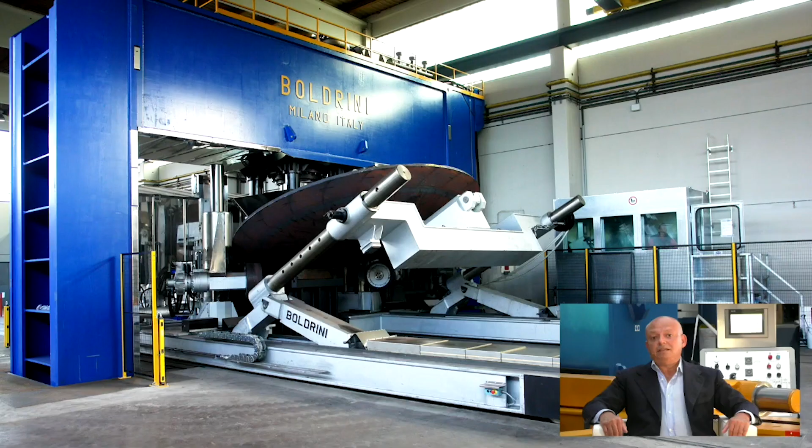Dishing press, 1,200 tons with automatic manipulator CN capable of working in hot and cold condition. Flanging machine capable of flanging up to 80 millimeter thickness material, 516 grade 70, and maximal knuckle radius of 1,000 millimeter. Rotex hot spinning machine. It's a unique piece of equipment capable of doing hemispheres and heads starting from a flat blank 7,200 millimeters and plate thickness 220. And also plate roll with variable distance, so the pitch of the bottom roll, 3-roll type.

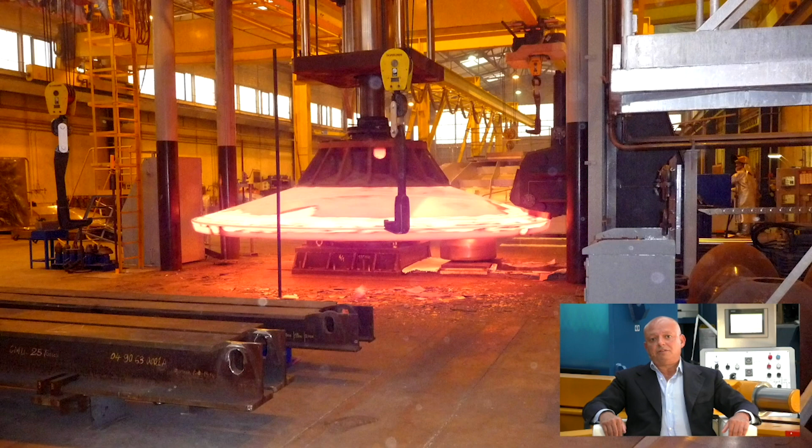6,750 tons. I think that there is always room for innovation and sustainability. Faccin Group embodies this spirit by offering to the market 3 leading brands like Faccin, Boldrini, and Roundo. Our challenge today is to achieve the highest level of efficiency in any kind of machinery that we produce. Well, I can definitely say that we are in very good hands.

But before we move to the main subject of this webinar, Rino, I wanted to ask you something. We have seen a huge interest in this webinar and many registered people from all over the world. Why do you think this is?

Well, Javier, let me start by saying that most manufacturers of pressure vessels, truck tanks, silos, and other kinds of tanks and pressure vessels purchase the dish heads and then weld the component to their rolled part. Let me tell you that the demand is huge and dish head manufacturers are getting overwhelmed. With the pandemic, deliveries, particularly internationally, have been disrupted. And there is now a new line of thinking about manufacturing locally, and I do believe this is driving our interest in this webinar.

Perfect. So we will focus on this concept and more during our webinar and explain in detail what we are doing to achieve efficiency in our machines. In the meantime, let me show our viewers our group's manufacturing capabilities.

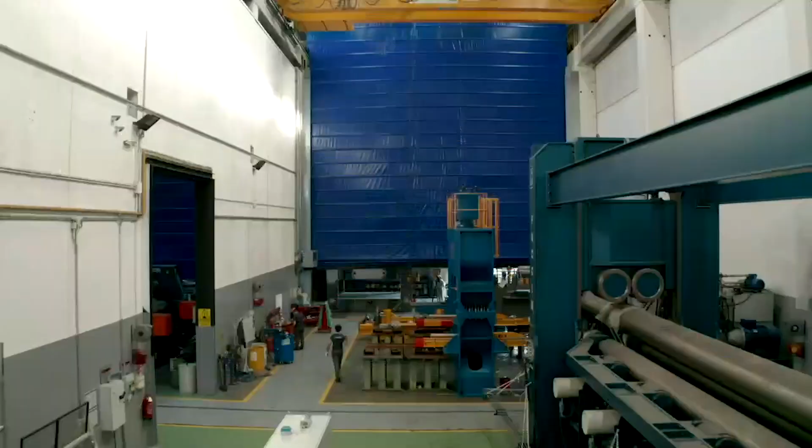Wow. During these days, we have been discussing all over the world about the impact of COVID-19 on the world economies and on industrial production after the restrictions applied to contain the pandemic.

So, Rino, what do you think about the vertical production structure? Javier, this is a real big thing. During the last decades, many industries have organized their supplies by outsourcing from the market. It has been understood very clearly now, when the market collapsed and many companies could not follow their production schedules and supply chains were not performing, that outsourcing can be risky in such a market condition.

As you have seen in the company video, at Faccin we have vertical integration. We start with plate profiling, fabricating, machining, and we can do internally turning, milling, boring, and polishing.

We found out that having this in-house has been the greatest support for our resilience. We have full control of quality inspection, pre-shipment commissioning, testing, and crating for shipment. It was a wise decision to keep vital and critical production stages inside Faccin. This allowed us to keep working and acquire new orders, as we have better control on delivery and scheduling.

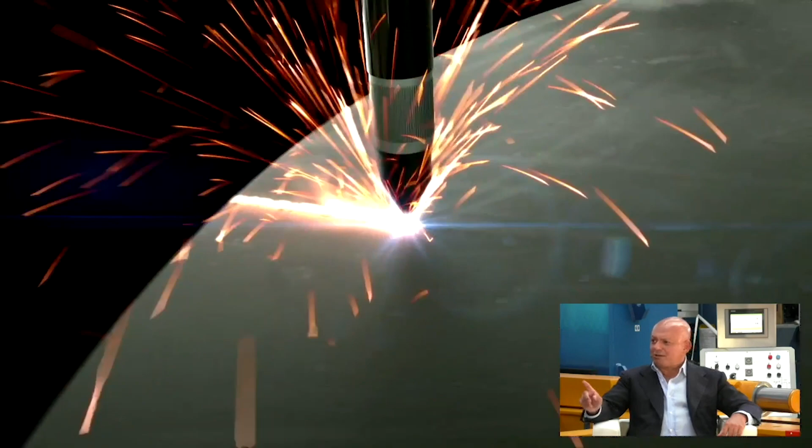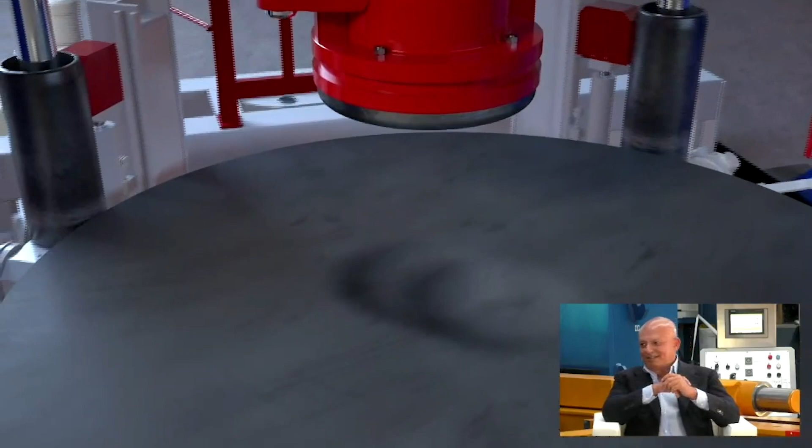Rino, we are now ready for the first main question. If I were a client, what should I know before investing in a new dish head line? At first, Javier, there is not a common rule. What is best for one client is not the best for all clients.

Rino, I think we both agree on your assessment. Tell us how to get the best solution for a specific customer. As a first step, it is very important to make the preliminary approach to the customer's needs. The pre-feasibility stage is the most important for the proper definition of the correct machine.

Let's ask Andrea Comparin, Senior Sales Manager of Faccin Commercial Department. Hi, Andrea. Can you introduce yourself and then explain what is generally the client's preliminary approach?

Hi, this is Andrea Comparin. I've been working at Faccin since 2011, and I've had the opportunity of traveling throughout the world for the company, mostly following Northern Europe and some Mediterranean countries. I also joined the sales team for relevant projects all over the world, from Australia to South Africa, Middle East and Far East.

Generally, we deal differently with inquiries coming from new clients planning to start a new production line versus clients already experienced with presses and flanging machines. For new clients, we have a detailed procedure to define their technical needs. We assist our clients with the complete definition of their new production process, explaining from the beginning what really matters for them.

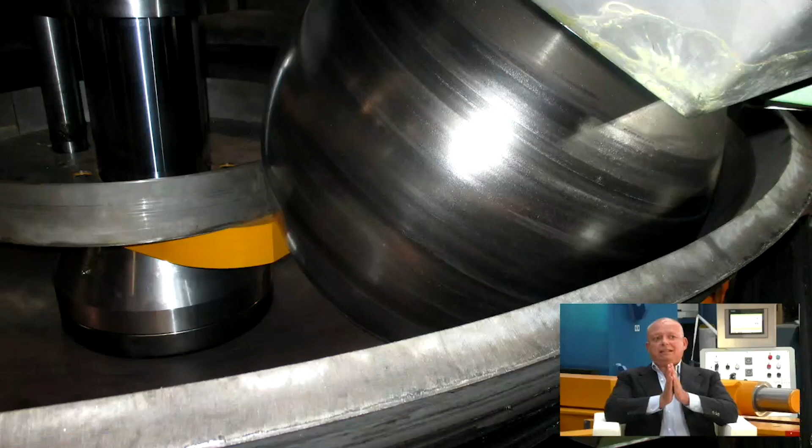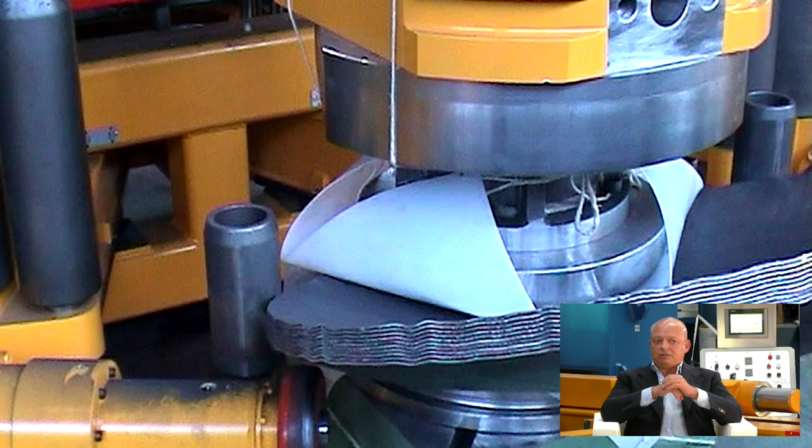Javier, you're asking something very important. Many times we see proposals from our clients, and at first sight they just look like a list of brands and components used to manufacture the machine. We are a machine manufacturer, and we care about components, but our target is not reselling pumps, bearings, valves, or electric motors. What we have to sell is the performance, and we have to guarantee the performance of our machinery. Our machine has to be a profit-making unit for our clients.

Rino, let's make it simple for our viewers. How do we get to a sustainable investment for our customer?

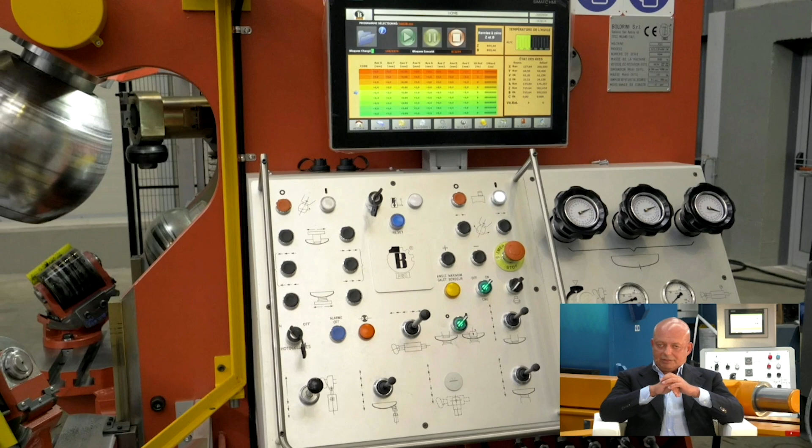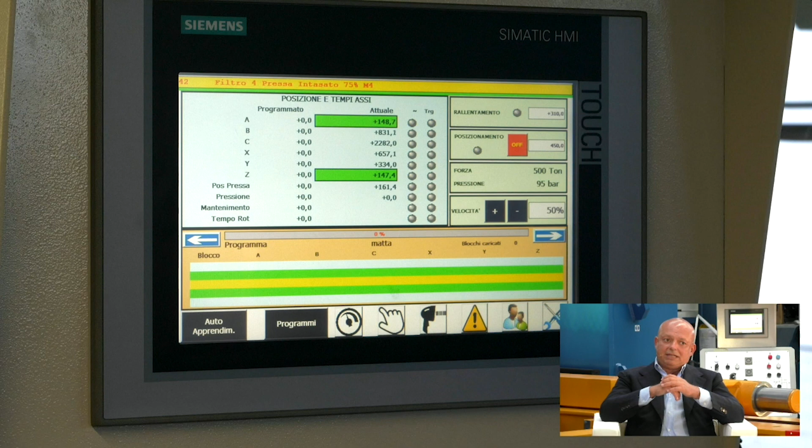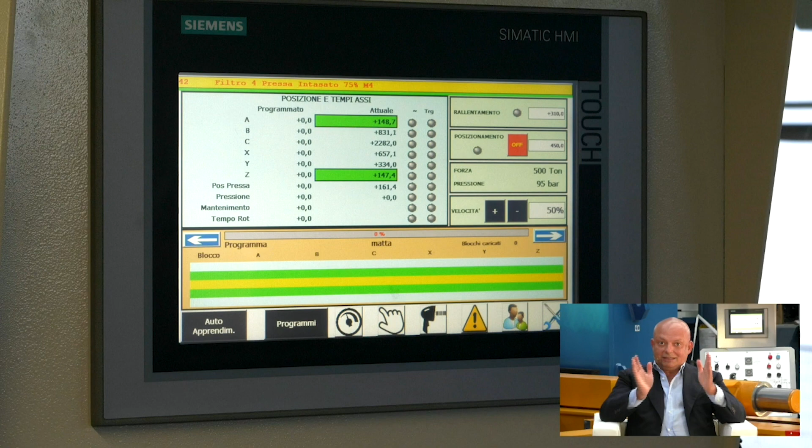We start from the performance of the machine and the production output. We are investing in new software to increase the data output of the machine so that our clients will have the machine linked to their network, with the possibility of checking from back office how many hours the machine was active, how many hours it was running in production, and the total daily production. In some cases it will be possible to upload production cycles directly from the office to the machine, and also our target is to check the final production cost of dishing and flanging, including the energy cost applied for each stage.

And also, we have to be predictive for the maintenance of the machine. It will be a modern and updated way to have a better footprint in the production plant of our clients, and to reduce carbon emissions and protect the environment.

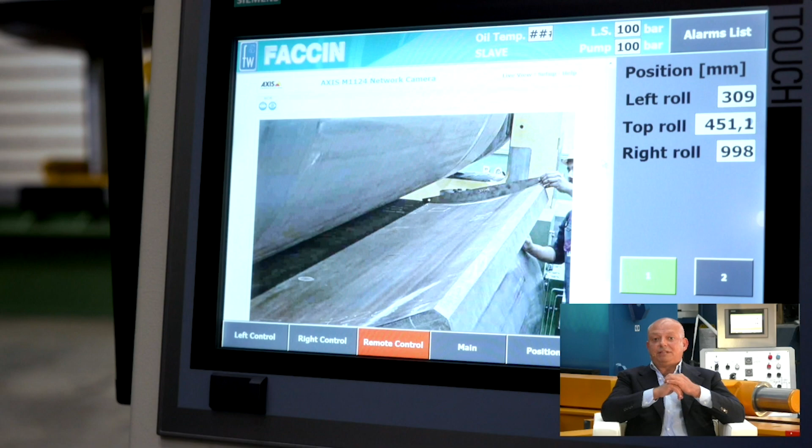It sounds very interesting, Rino. Could you please explain what else we could offer to our customers?

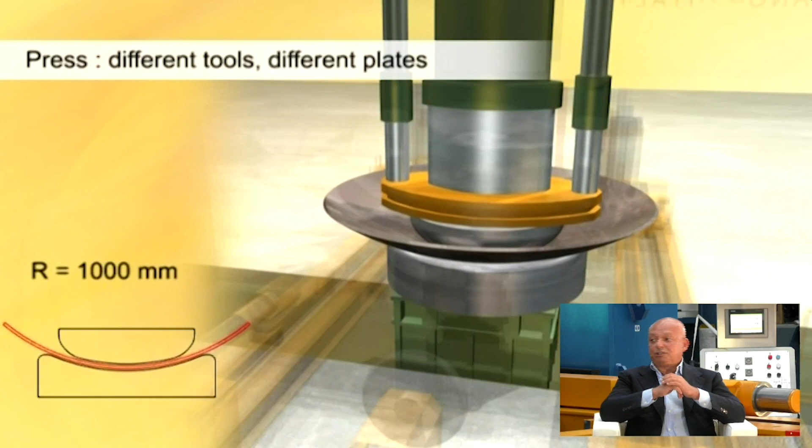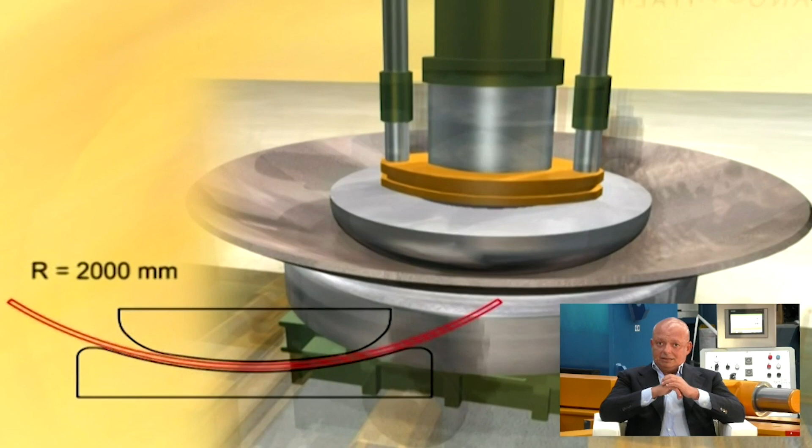Javier, we are very flexible to adapt to our clients' needs, and for many decades we have manufactured many different types of press dies for specific needs. The right press tooling might reduce the production time up to 30-40% in the total dishing time, and it can also reduce the thinning.

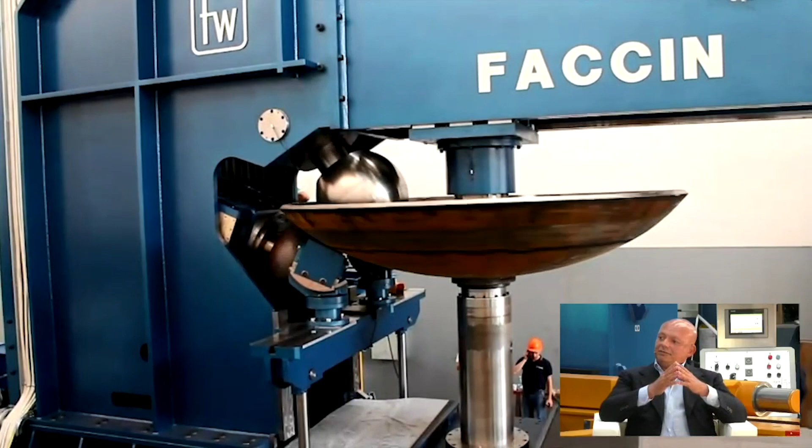A typical example is when we press aluminum plate. Some kinds of diameter and radius require changing 3 to 4 dies, and the time to change the dies is much less than the total time if we were not doing this process. So at the end, we save time.

Using the right tools, we also significantly reduce the thinning. Why is that? Because we don't overwork the material, and saving the material is the first target for a client. We may also save on intermediate heating processes, because if you can control the thinning, we don't need to add extra expensive heat treatment. I think Marco Massensini could tell us more about his experience.

So Marco, can you tell us about yourself and your experience in the support process to your clients?

Hi Javier, I'm very dedicated to the support of our clients, and I recently had a few cases that we studied and carried out successfully. I joined the Faccin family 4 years ago, with a process engineering degree. I've had a great chance to grow my capabilities following very interesting tasks.

One client with 25 years of market activity producing equipment for the pharmaceutical and food and beverage industries had developed its own equipment. I analyzed their production steps with them, and finally we came out with new machinery and new processes. The final result was a significant production cost reduction, and our client was very satisfied since they obtained a higher added value product to offer in the market at a better price.

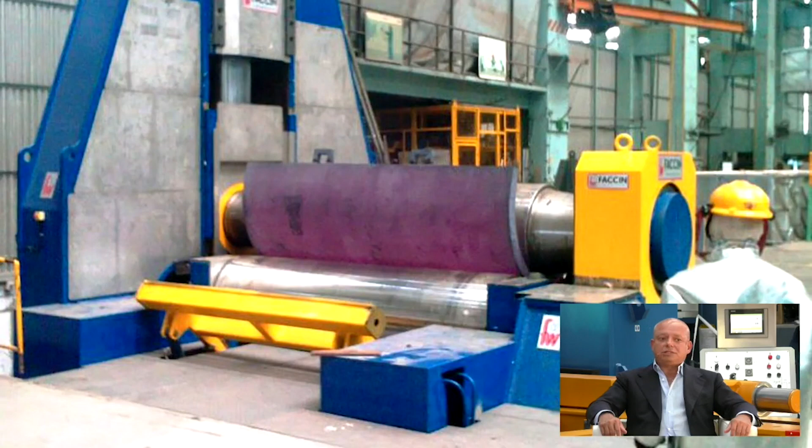We have materials that can be formed in both cold and hot condition, and we choose hot forming many times to increase the forming capability for higher thicknesses. In pressing, we may also choose the hot process to reduce thinning and to cut the manufacturing process time.

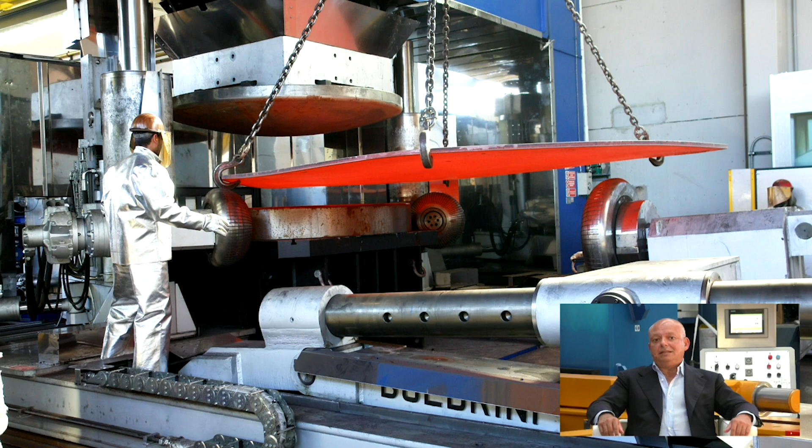We have a very successful experience with the dishing press and manipulator to press plates up to 160 millimeters in hot condition. In other cases, the heat delivered to the plate is necessary to avoid damages on the material, for example aluminum, where we have to heat the plate up to 250, 270 degrees to avoid any cracks.

In other cases, titanium. If you don't heat titanium up to 500 C, there are no chances to form titanium without damaging dramatically the material.

Hi, this is Diego Morbini. I've been working at Faccin since 2005, and I visited many countries during my time at the company. But I now follow mostly the Chinese market, Far East, and Oceanian countries. I also support the sales team in relevant projects, from the technical evaluation of special equipment to tailor-made solutions for different fields of applications.

It's very important to start with a proper definition of our clients' needs, as this is the key to the right proposal. I've got experience in selling forming lines to customers that manufacture pressure vessels and also cryogenic tanks. In Vietnam, for example, we were successful twice with a client that produced heads for the global market.

So Diego, in your opinion, what is the key factor of your marketing strategy? I think that our clients do consider the support we offer, from the proposal to the after sales. We build up confidence based on the long experience of the group in design and manufacture of head forming line.

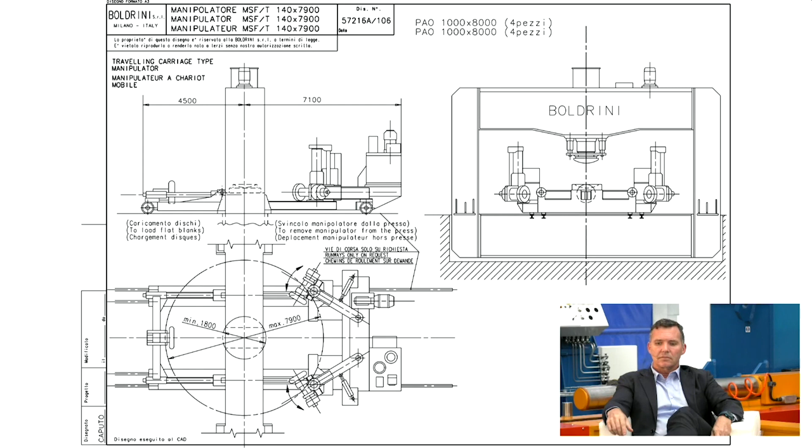Rino, I would like to show some pictures. Would you like to comment? Surely, please. Well, you can see in this picture a layout drawing of a typical dishing press with manipulator.

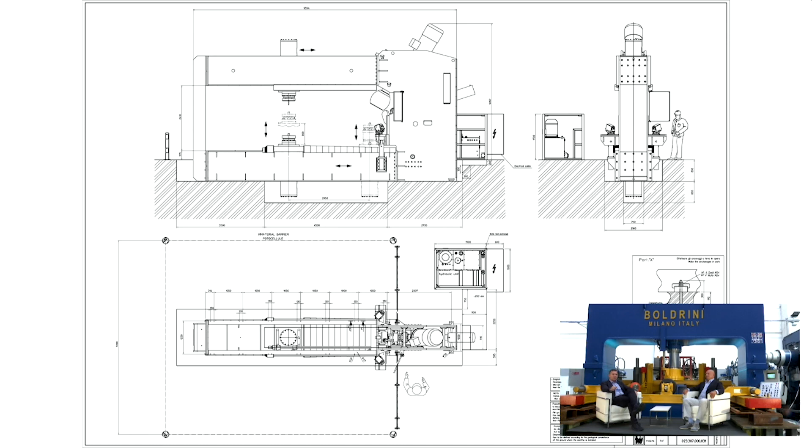And this is specifically a machine with a pretty big daylight of 8 meters and 1,000 ton force. In this other picture, we can see a flanging machine designed to make heads without center roll, very suitable for high alloyed material and stainless steel.

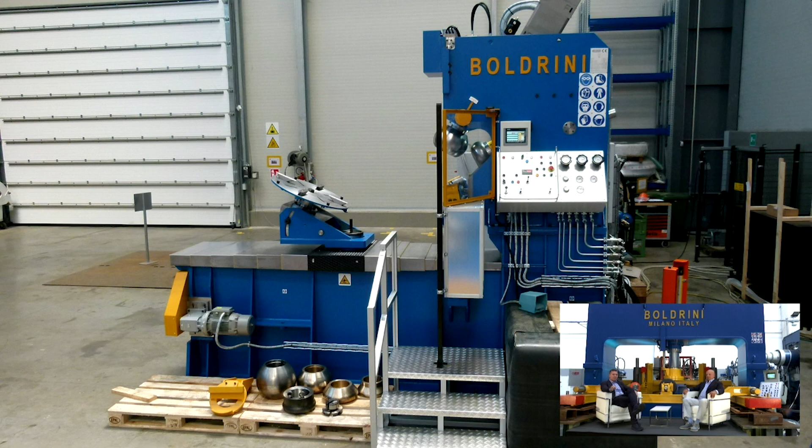And this small flanging machine, it's small but powerful because it has interesting features. It can work without the upper beam. It is very fast. It is very versatile, especially to make a conical shape, tilted and with vertical axis of the cone.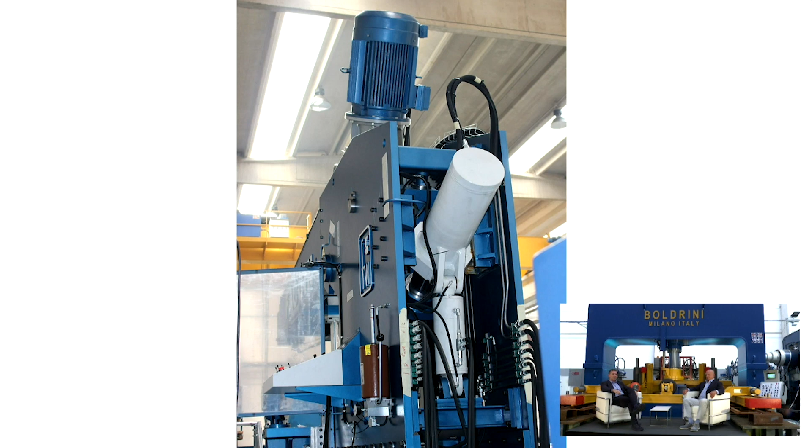And this is one of the latest generation of Faccin flanging machine, is with electric drive and inverter. And you can see from the back part the internal part of the mechanical and the control of the horizontal cylinder.

So one relevant application is the construction of truck tanks. We have received many inquiries about different shapes of these heads. Could you please explain our system?

Well, Javier, there are different methods to build truck tanks. Let me start with the oval and elliptical section type.

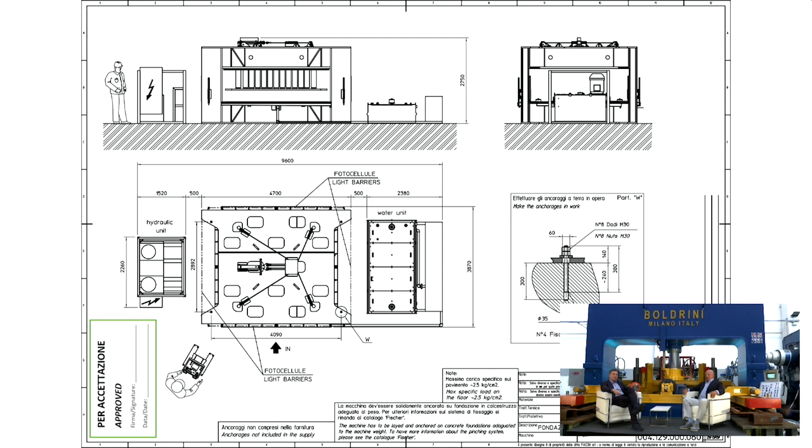You can see in this picture the layout of a very special press. It's a hydroforming press designed to make oval, elliptical, and multi-center heads. In the next slide you see the specific part produced. Being formed with hydroforming, the stresses are very even, there is no part of the material that is overworked, and there are no damages on the surface. It is also a very fast process.

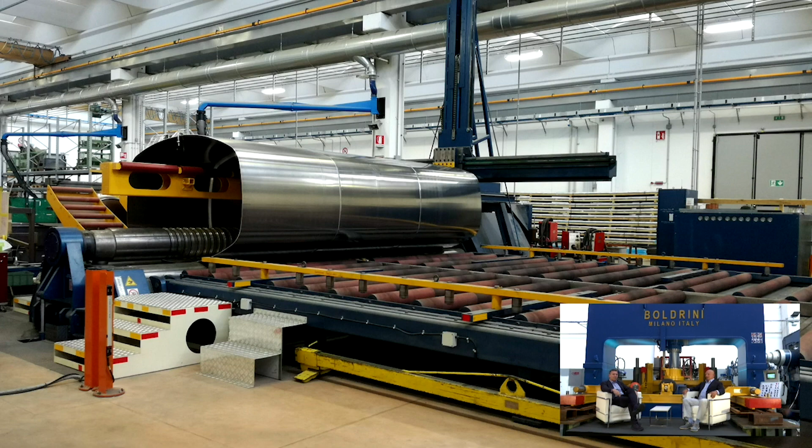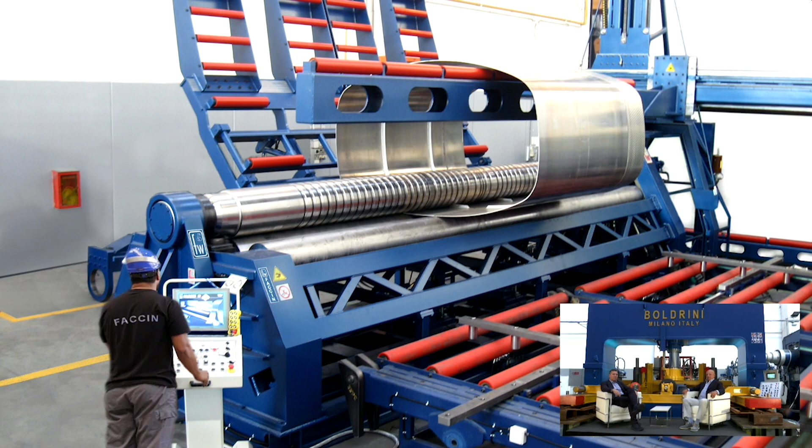As we said, we also have the capability of doing CNC plate roll, 4-roll type, especially designed to make the shell part of the truck tank. In this case, the top roll is designed with special grooves that are necessary when we roll shells already welded with inside stiffeners.

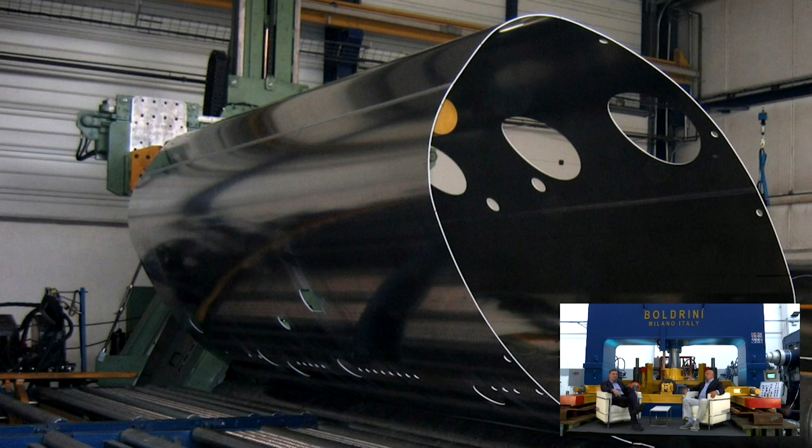Or we can even make elliptical shape shells when the machine rolls plates that are already pre-machined with holes and pierced.

We have so many different configurations and models, as we might see in the following pictures. What is the technical reason of such design variety?

Javier, for any different design there is a reason: saving production time first of all, and optimizing the process line. Let me explain going to the pictures.

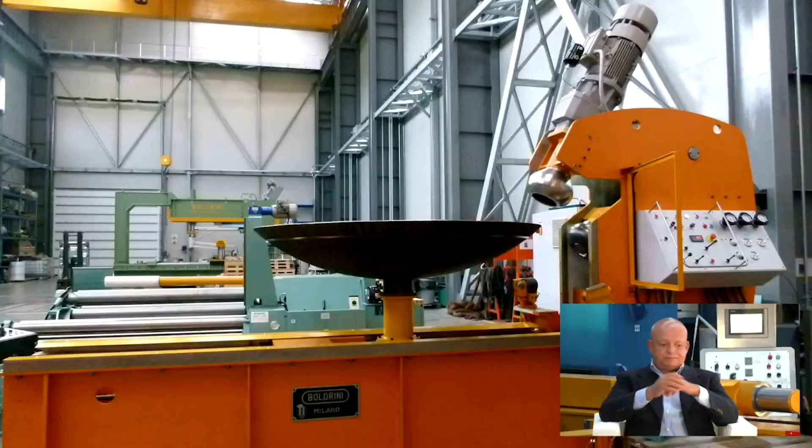This machine is the smallest we have in the range, a 6 millimeter up to 4 meter diameter flanging machine, electric drive, very effective machine, and special for simple tank manufacturers.

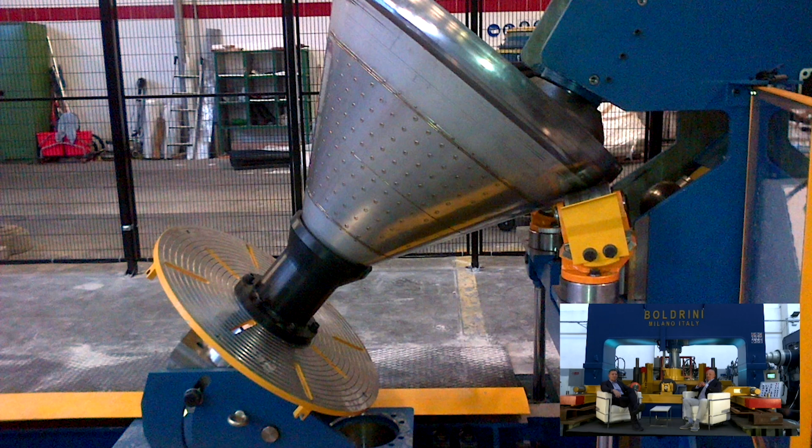We have a similar machine with a device studied to flange conical shape, tilted. This is for food industry, for example.

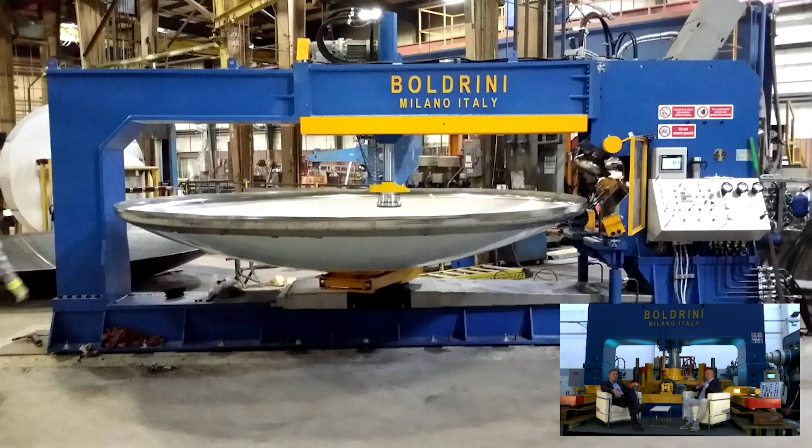This other machine is a combination of a machine without center hole and with center hole. One part of the machine can be disassembled in order to reach higher diameters, or it can work without center hole, and it is very effective when we work on stainless steel blanks.

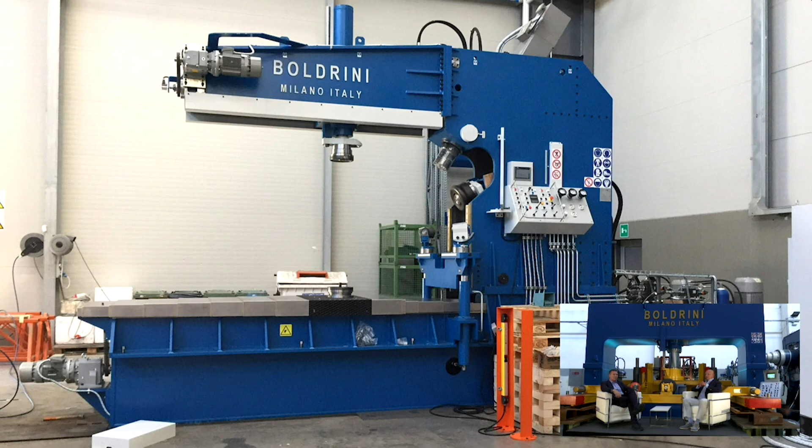This is a typical configuration of a machine with center hole. This is with electric drive and all the most modern control for the hydraulics.

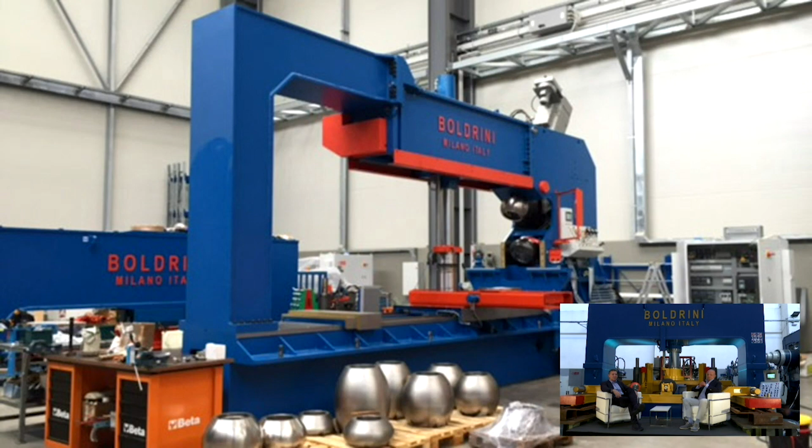This is a similar machine for higher capacity. It can also be supplied in the configuration with and without center hole by removing one portion of the upper beam.

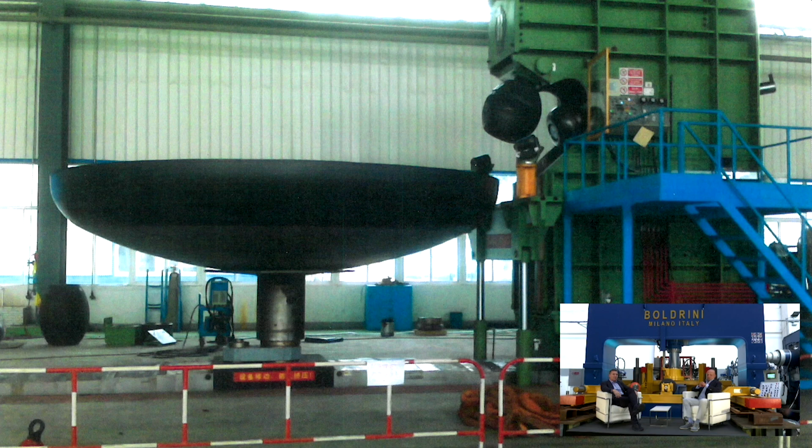And this is a unique piece of equipment, a flanging machine in a configuration that can flange components up to 12-meter diameter. 12-meter diameter is 40 foot, a very big diameter, with a plate thickness of 35 millimeter. It has a very special clamping system that does not require any man operation in the lower carriage.

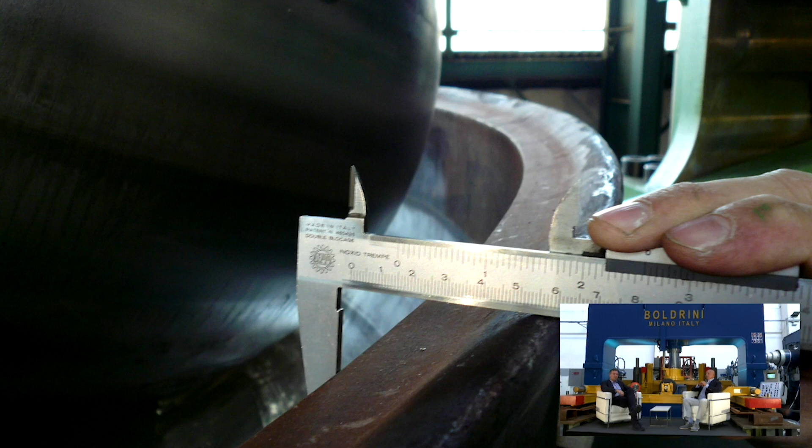We can also offer a wide variety of capability in working on plate thicknesses. In this specific case, we have a head done with a thickness of 65 millimeter, and this is done with a special machine that can make components up to 80 millimeter in cold.

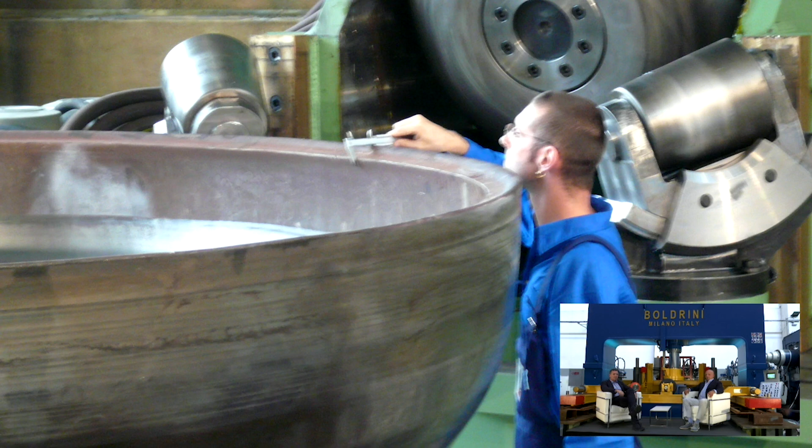You can see very well in this picture what is the massive wall of the head compared to the hand of the operator.

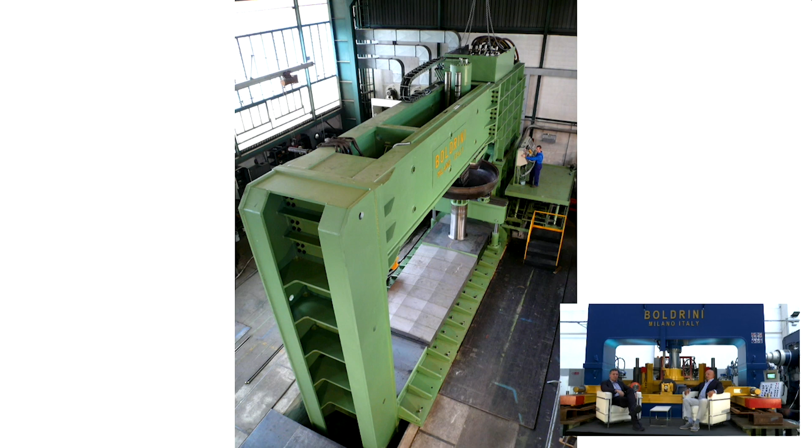And here you can see how massive is the machine that today is still the highest capacity machine in the market, 340 metric tons, with an incredible capability of making heads without center hole.

So, what about the technical reason of different press design and application for the automatic manipulators? Javier, we can press parts from 250 millimeter diameter up to 10 meter diameter, and in some cases we can also look at the specific client demand.

We can also recalibrate finished heads, or we can even make very long segments for larger spherical field tanks. Any custom design can be done by our technical department, and we have presses that can cover the whole requirement of the industry of tanks and pressure vessels.

With this tiny press, 150 ton, it's a very fast equipment, very suitable for small components.

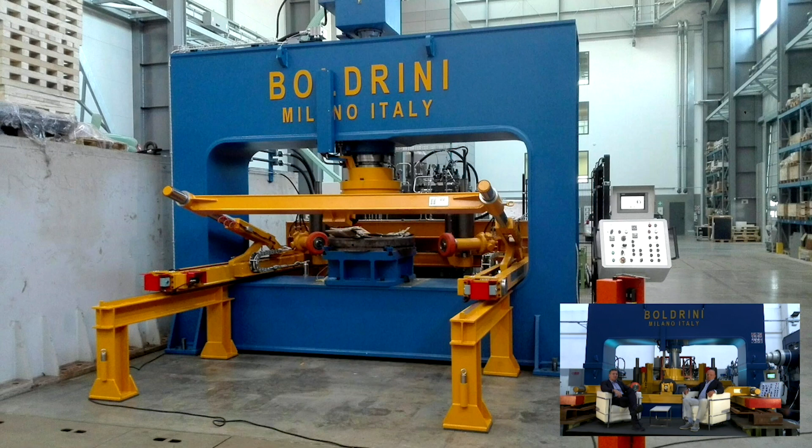This is a 200-ton press with CNC control, with a manipulator designed also to make parts of a small diameter.

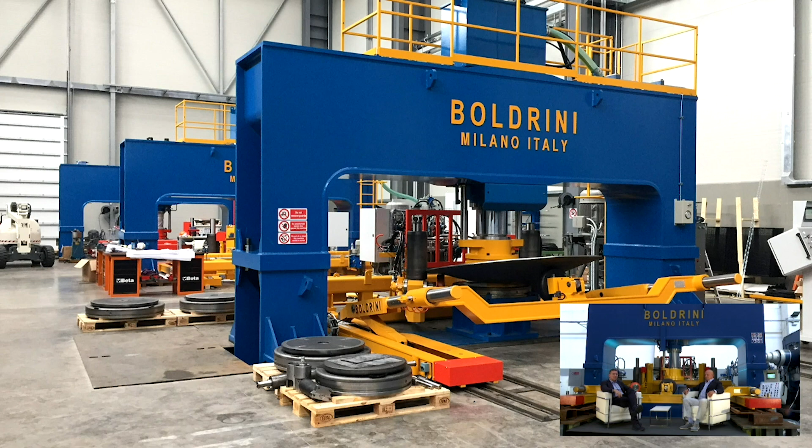This is a 300-ton press, typical for a tank producer and also for trailer tank producer.

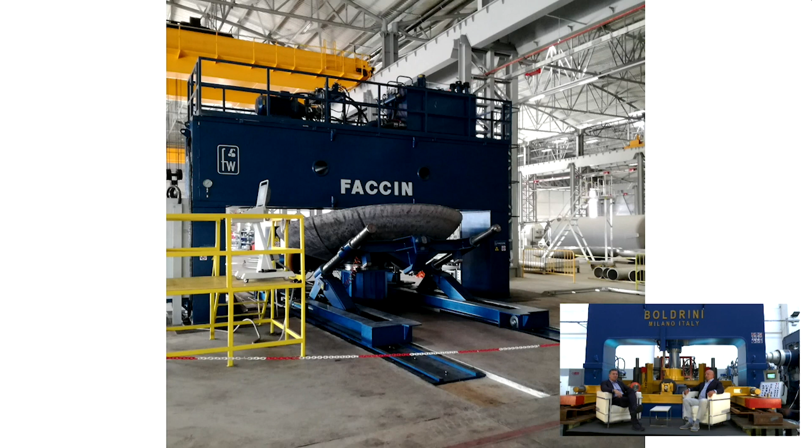This is a 600-ton press for heavy-walled material, with automatic manipulator.

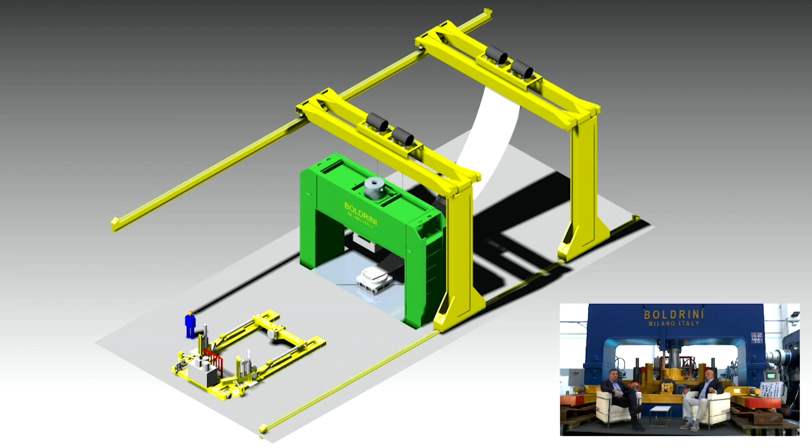In this layout, you can see the combination of the crane and the press to press long segments to make spherical field tanks, and a manipulator to make the crown.

And this is the typical design of the automatic manipulator that fits in our presses and in many other presses.

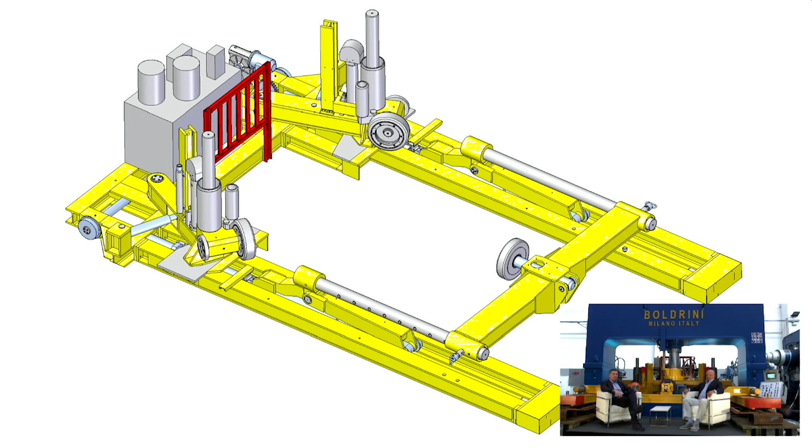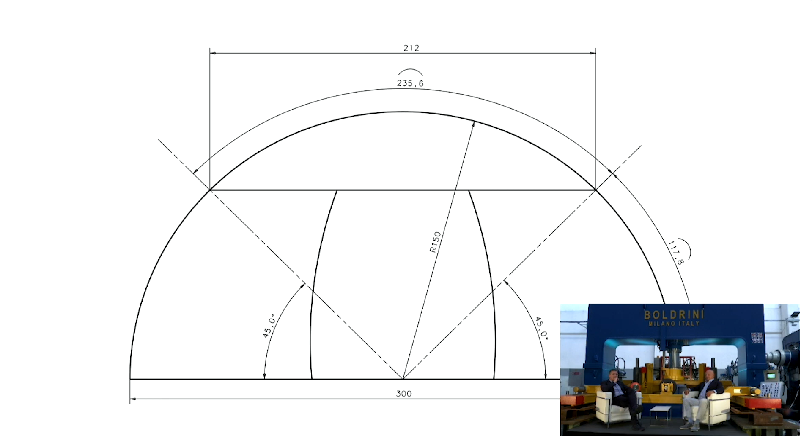When we are talking about very big diameter hemispherical heads, or very big elliptical heads, we have the possibility of doing that with the technology of crown and petals welded together. We can design the complete process so that with the press we can do the segments and the crown. We also have C-frame presses that are very suitable for recalibrating heads and hemispherical components.

So, Rino, what is the most difficult task in manufacturing machinery capable of warm and hot working? Javier, we have to consider three aspects. First, the design of the machine - we need to protect parts of the machine from excessive irradiation. Second, and very important, we have to protect the worker and the complete process line around the machine. Third, we need very accurate controls to avoid thinning and damage to the material.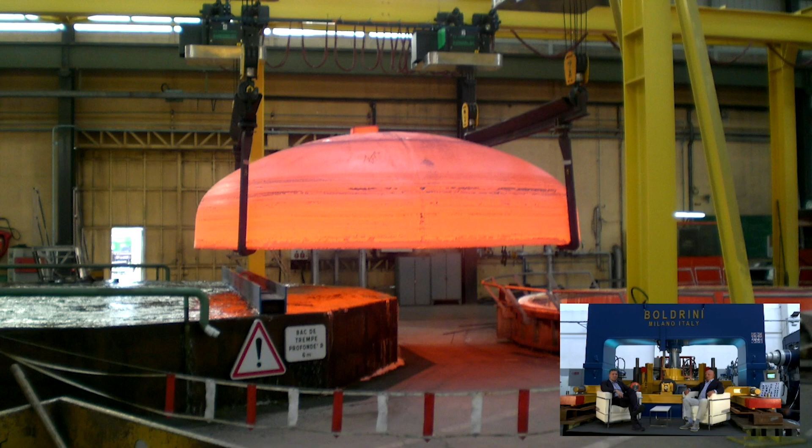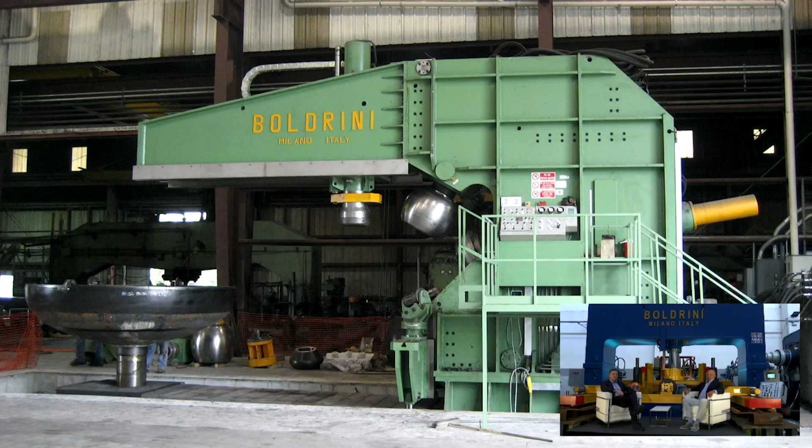We have done the widest span of application for warm and hot forming in the head and tank industry. You can see in this picture a very thick wall component for the nuclear industry. This is a special configuration of a 32mm flanging machine with hot protection, and also the possibility of tilting the upper beam to the side, in order to make very high and complex components like cones or asymmetrical cones. This is a larger size, also with hot protection, to make heads up to 50mm thickness.

So, Rino, I understand that hot working is very important in many applications. Could you explain more about this subject? Certainly, Javier. Let me comment on the following picture explaining the advantages and peculiarity of the hot forming process. This is the Rotex, the hot spinning machine. Using this machine, we can make hemispherical heads, conical heads, ASME elliptical heads, starting from a flat blank, because with one machine we do the crown and the flange area.

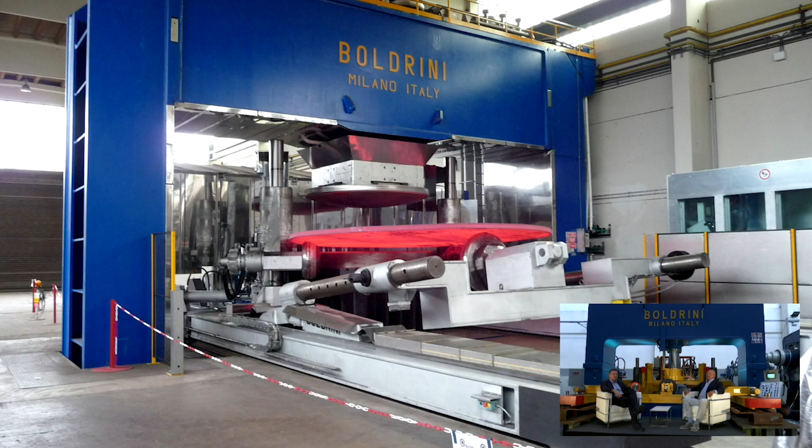This is a special configuration of dishing press designed to work hot blanks exactly like working with cold blanks. We designed it with all the protection and better kinds of control, and this press can use larger dies in order to reduce the process time.

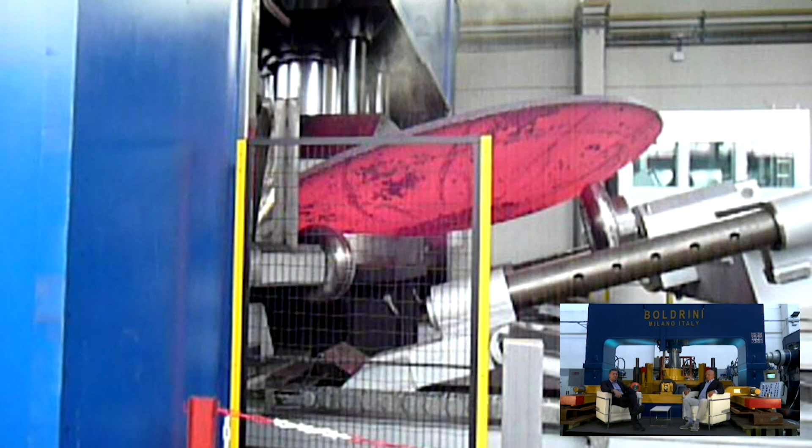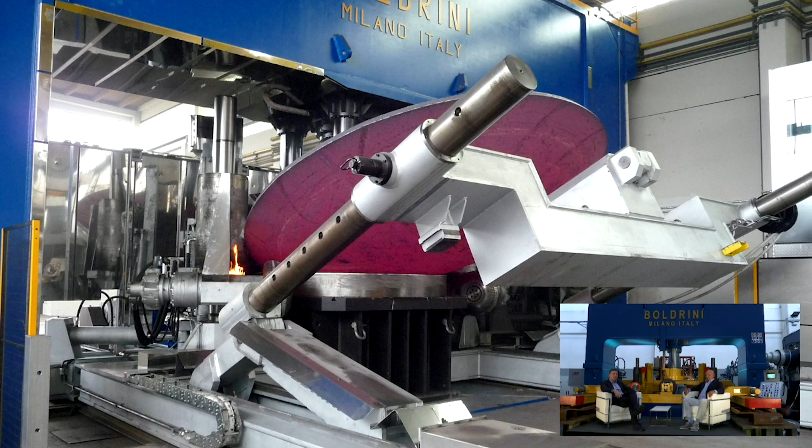You can see one phase of the process, and the piece is still very hot, and we have already reached a good shape. You can see now that the piece is cooling down, and the shape is practically finished. And here we are at the last steps of the process.

So, the return of investment and the performance of head forming machines - Rino, how would you approach this subject? Javier, the range of the Boldrini Faccin machines is actually the widest in the market. We are able to guarantee a solution for any material, any kind of carbon or alloyed steel, any kind of stainless steel, and the duplex family. But also, we can work on titanium, copper, aluminum, and clad plate.

So the life cycle of an investment is also linked to the productivity and the scheduled service of the machinery. Massimo, can you tell us about the new improvements in your department? Hi Javier, service is a very sensitive area, as we are responsible for the machinery, from testing before shipment up to units already installed for decades.

We have a file for thousands of machines, and we don't stop - we are constantly making improvements. A WhatsApp quick contact center for instant communication, in addition to technical improvements for remote communication with existing and new machines. This is a cloud-based service connected through a smart box installed in the machine cabinet. This smart box is also designed to upgrade equipment and monitor certain functions.